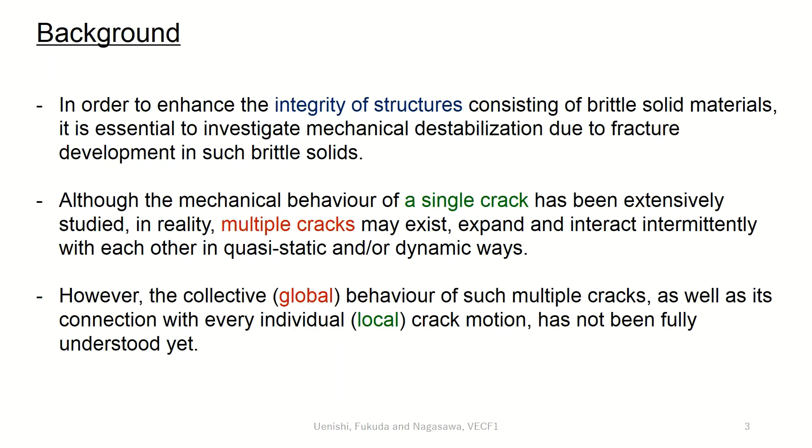Therefore, here, by using the experimental technique of dynamic photoelasticity in conjunction with a high-speed digital video camera, we examine fracture evolution in a two-dimensional, initially linear elastic rectangular polycarbonate specimen where sets of cracks are prepared by a digitally controlled laser cutter and tensile strain with a prescribed constant rate is externally applied.

We trace local fracture development around each individual crack, and simultaneously, we obtain global stress-strain curves and physical properties like tensile strength of the specimens. As theoretically predicted by Gomez, Uenishi, and Ionescu in the journal Engineering Failure Analysis in 2020, the stress-strain relation is largely dependent on the prescribed strain rate, and, for instance, at least for relatively smaller strain rates, the global tensile strength increases with the strain rate.

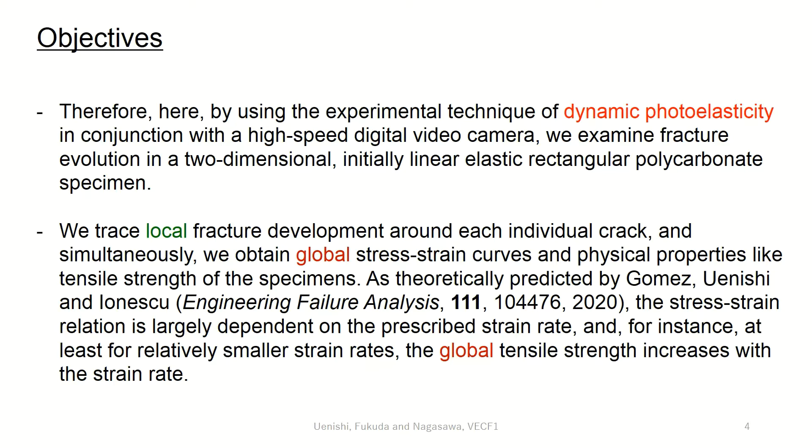By knowing the above global characteristics, then, we concentrate our attention to more local, secondary fracture induced by the extending main or primary fracture and its influence on the global nature of the specimens with multiple cracks. For various different distribution patterns and values of density of initial cracks, we observe the dynamic evolution of the primary fracture and the fracture-induced waves, as well as the generation of the secondary fracture.

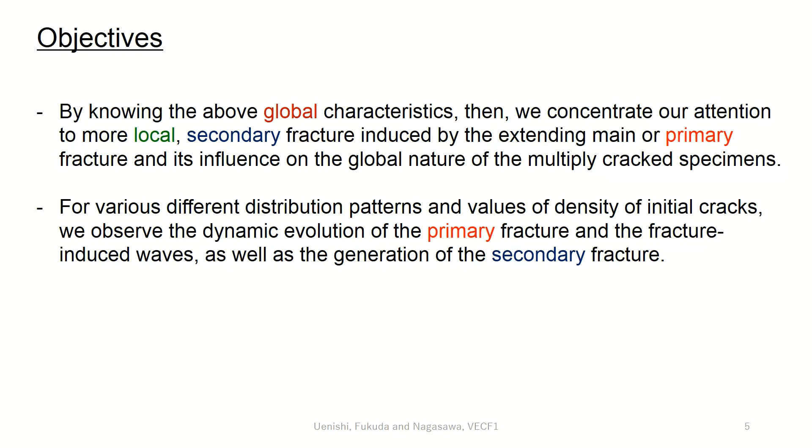Now let us briefly show you typical experimental results. As mentioned above, photoelastic polycarbonate specimens containing multiple cracks are prepared, and uniaxial tensile testing is performed under several different prescribed driving speeds or strain rates. Besides the global stress-strain relation, local dynamic stress evolution in the specimen is recorded by a high-speed digital video camera.

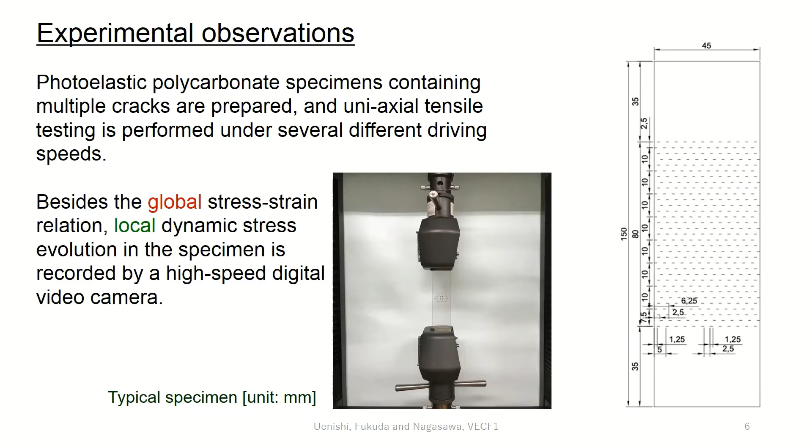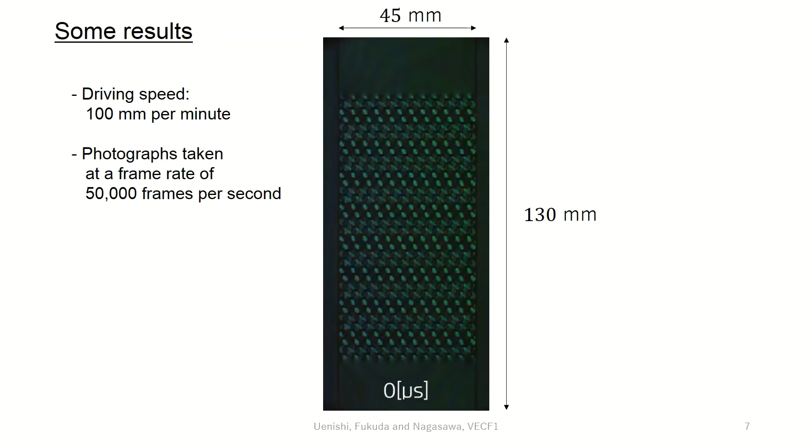The right figure illustrates an archetypal specimen used and elongated by the tensile testing machine. This picture shows the isochromatic fringe patterns or contours of the maximum in-plane shear stress dynamically developed in the specimen, just before the primary fracture is initiated, time 0. The driving speed in this case is 100 mm per minute and the following photographs are taken at a frame rate of 50,000 frames per second.

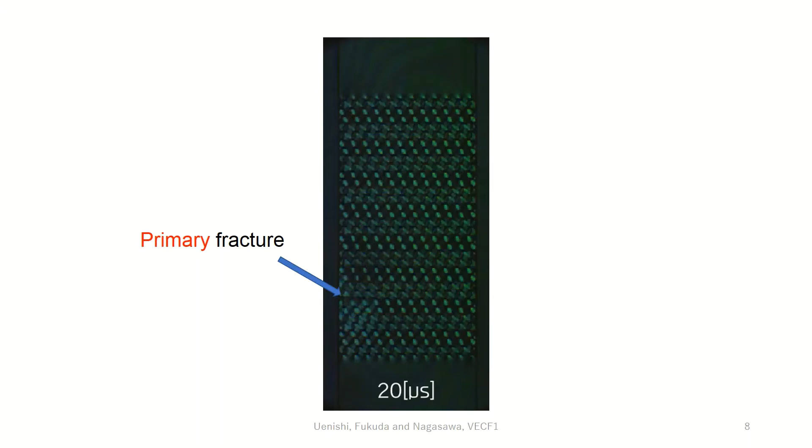Due to the action of the external load, the primary fracture develops. It moves from left to right. Also, branching of the primary fracture can be observed in this experiment. Here, at time 80 microseconds, total split of the specimen by the primary fracture as well as the initiation of the secondary fracture, which will propagate to the opposite direction, can be identified.

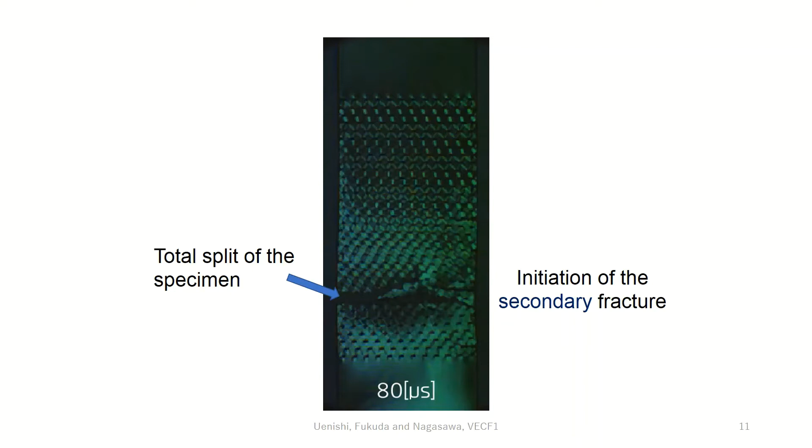At time 140 microseconds, the propagation of the secondary fracture arrests. Surprisingly, this arrested secondary fracture will resume its propagation in 200 microseconds, although no additional external load is exerted to the specimen.

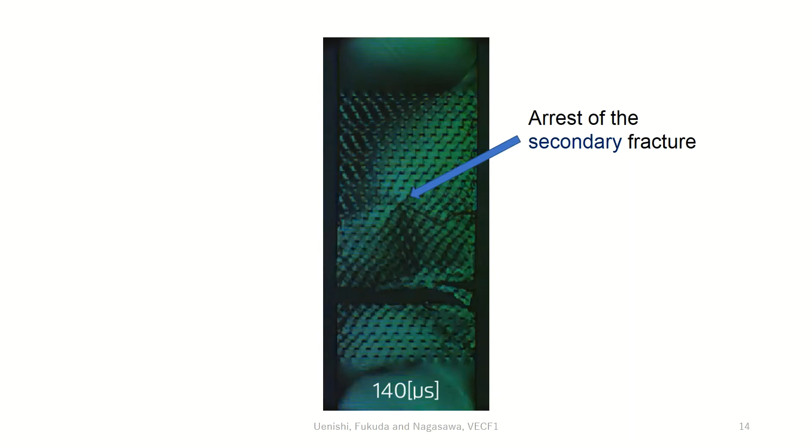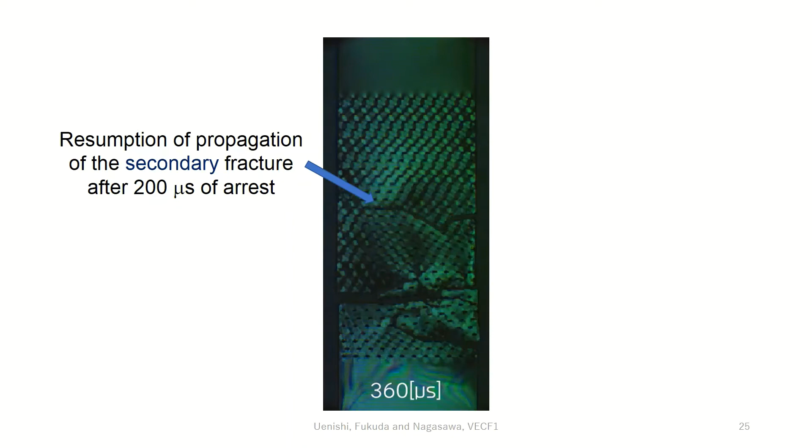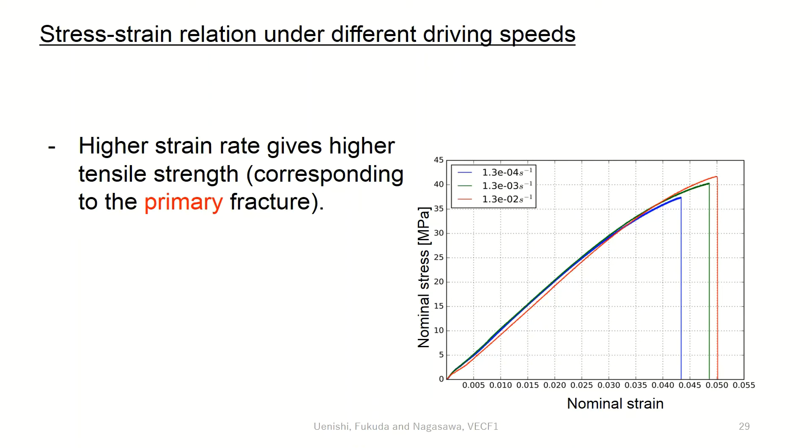Here and after, the resumption of the propagation of the secondary fracture can be recognized. At this point, let us summarize the experimental results. This diagram shows the relation between the nominal stress and the nominal strain experimentally obtained for 3 different driving strain rates. As predicted theoretically by Gomez, Uenishi, and Ionescu, a higher strain rate gives a higher tensile strength corresponding to the primary fracture.

Dynamic fracture development can be categorized into 3 stages. The first stage is propagation of the primary fracture, between time 0 and 80 microseconds. The second one is initiation and arrest of propagation of the secondary fracture, between time 80 and 140 microseconds. The last one is resumption of propagation of the secondary fracture, between time 340 and 400 microseconds. Obviously, the secondary fracture propagates even without additional external load. That is, its expansion is owing to fracture-induced waves.

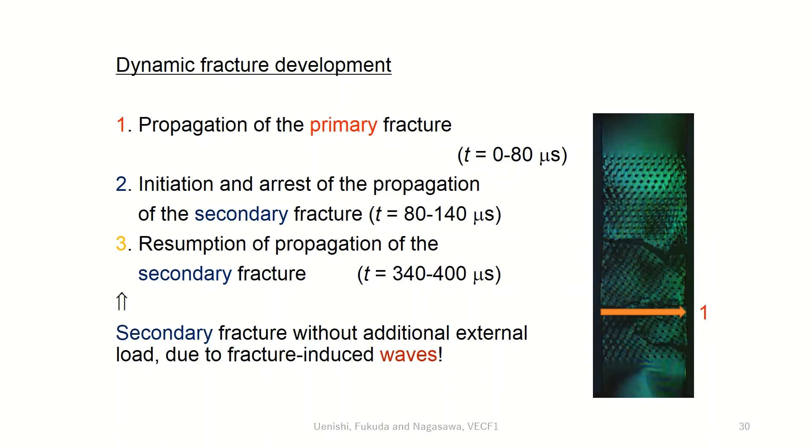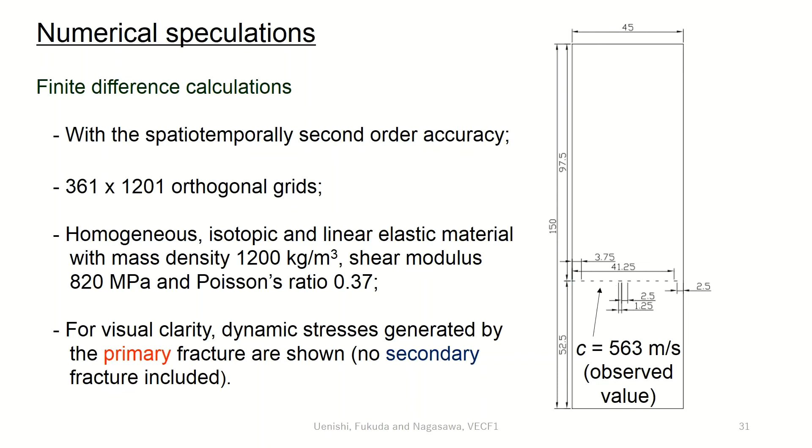Let us move to the numerical part of the study. Finite difference calculations have been performed with spatio-temporally second-order accuracy, with 361 times 1201 orthogonal grids, for a homogeneous, isotropic, and linear elastic material with mass density 1200 kg per cubic meter, shear modulus 820 MPa and Poisson's ratio 0.37. For visual clarity, here, dynamic stresses generated by the primary fracture are shown, with no secondary fracture included. As in the experimental photographs, contours of the maximum in-plane shear stress will be depicted.

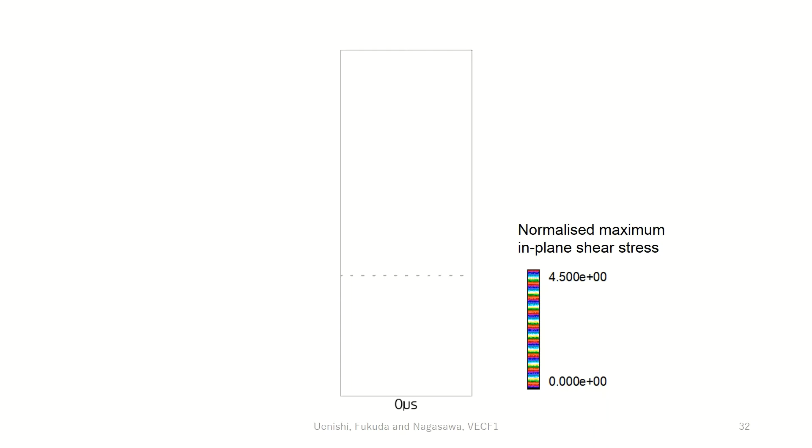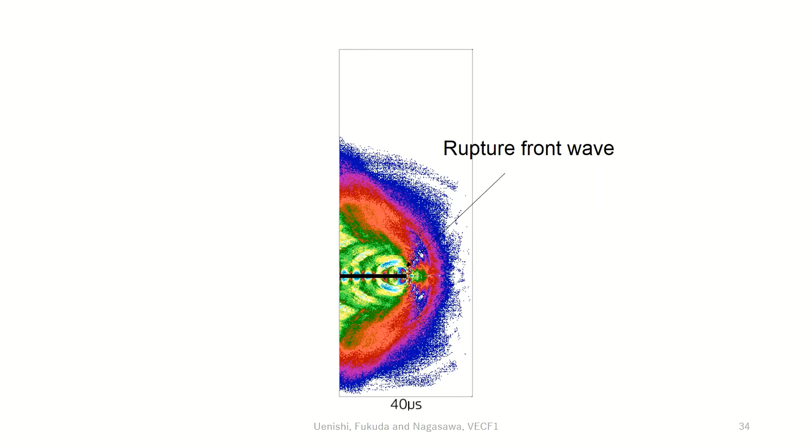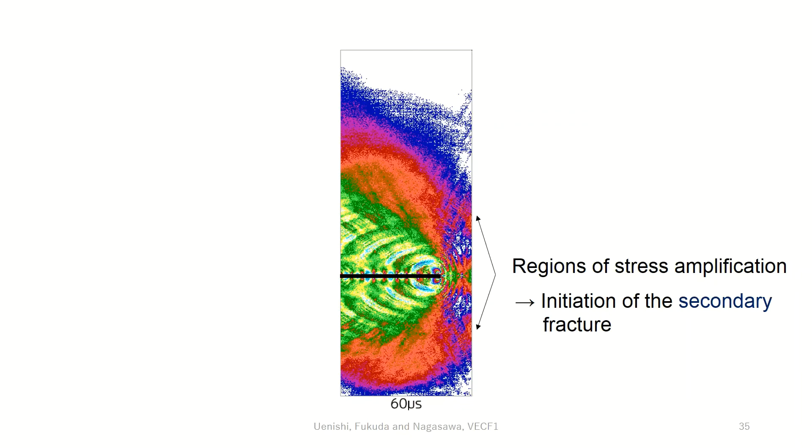The primary fracture propagates at an experimentally observed speed of 563 meters per second from left to right. Around the tip of the primary fracture, the so-called rupture front wave develops. At this stage, regions of stress amplification can be identified at positions away from the primary fracture plane. At these amplified regions, the secondary fracture will be initiated.

Upon total split of the specimen by the primary fracture, Rayleigh surface waves are generated and propagated upwards and downwards along the vertical free surface. The surface waves will move to the edges of the specimen, reflected and then diffracted to cause further fracture, or more exactly, the resumption of propagation of the arrested secondary fracture, at a later stage.

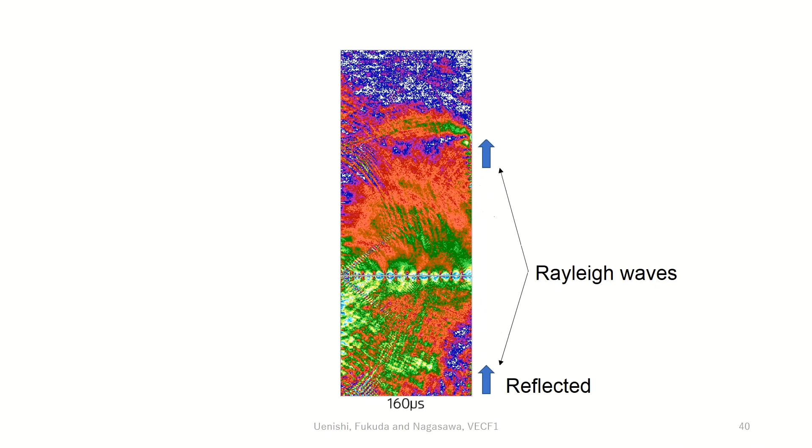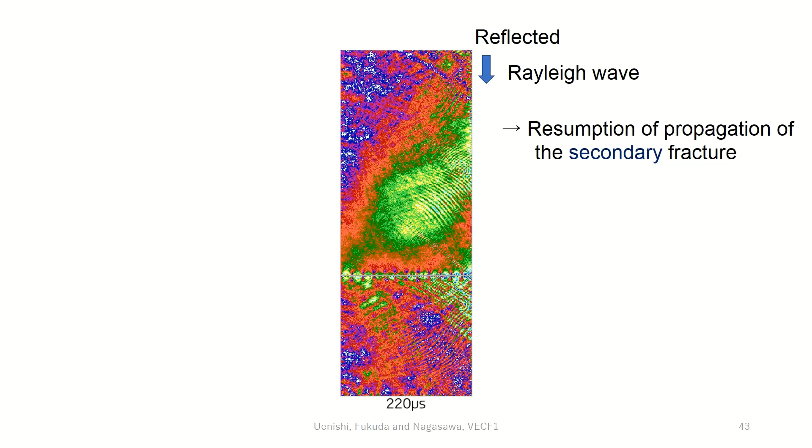The connection between the secondary, further fracture and the dynamic waves can be summarized as follows. Number 1. Generation of the rupture front waves around the tip of the primary fracture. Number 2. Initiation of the secondary fracture owing to the waves induced by the primary fracture. Number 3. Resumption of propagation of the secondary fracture by the reflected and diffracted Rayleigh surface waves.

Here are our conclusions of the observations. We find that after a total split of the specimen into 2 by the propagation of the primary fracture, the secondary, delayed fracture is initiated and propagated at a remote distance from the primary fracture. That is, fracture propagation may jump in solids with multiple cracks even when no additional external load exists. Moreover, in our observations, the secondary fracture moves in the direction opposite to the primary one.

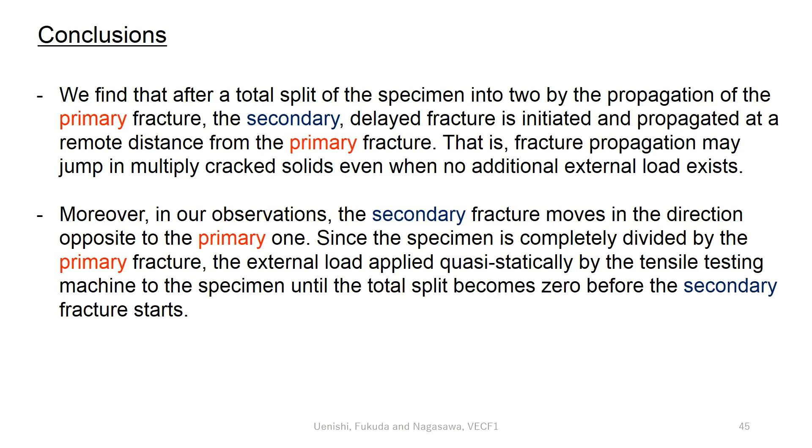Since the specimen is completely divided by the primary fracture, the external load applied quasi-statically by the tensile testing machine to the specimen until the total split becomes 0 before the secondary fracture starts. The secondary and further fractures, or a cluster of fractures, are obviously not caused by additional external energy, but by dynamic waves produced upon enlargement of the primary fracture in this case.

The development of the secondary and further fractures in a specimen of finite size may be concealed in the global stress-strain relation but may rather appear in a global pattern of dynamic wave radiation such as a doublet or a cluster of earthquakes, i.e. ruptures in the solid Earth.